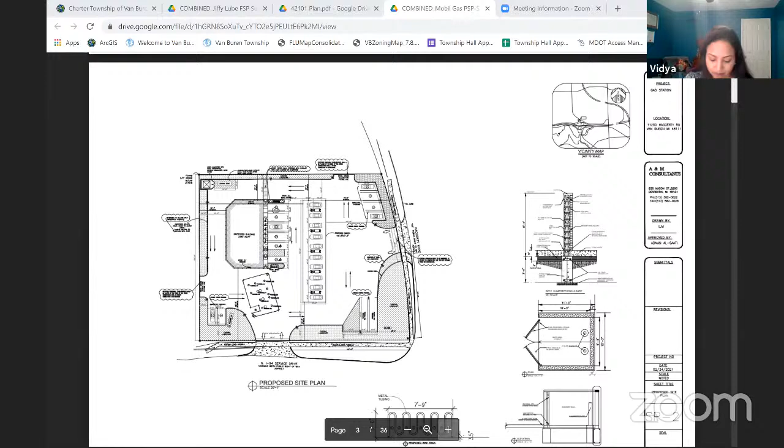With regard to cross-access, it is the township's policy to require cross-access to abutting properties because this is in the interest of a large-scale access management plan. The applicant has shown a cross-access on the north property line.

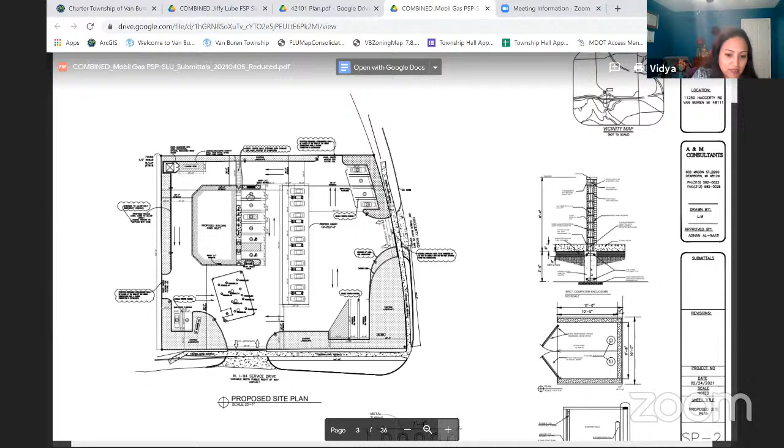If you look at the northeast side, Director Power, if you could zoom in a little bit, maybe it'll be more legible. Yes, the north access drive shows a cross-access point there. And then again, there is a cross-access shown on the southwest side of the property. Both of these will help connect in the future to any other development that takes place. Currently, those points are vacant.

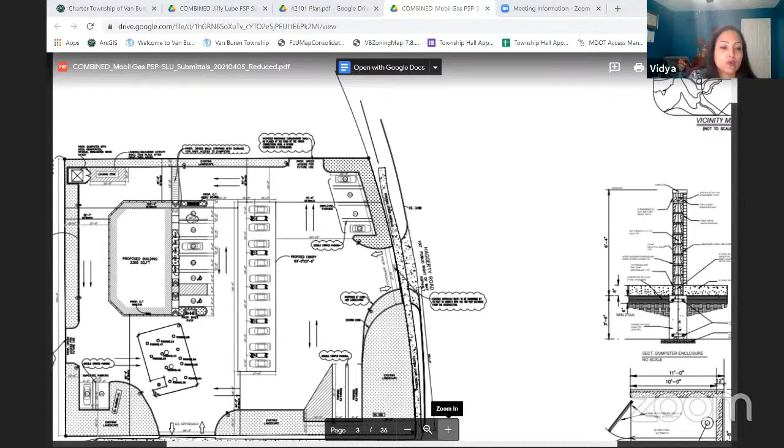There is a 21-foot wide access drive-through lane on the west side of the proposed building. So the drive-through works on the north side, moving to the west side, then the south side of the building, and exiting. We had the fire department review the width of the access drive on the west side of the building for adequacy, and that was approved by the fire department.

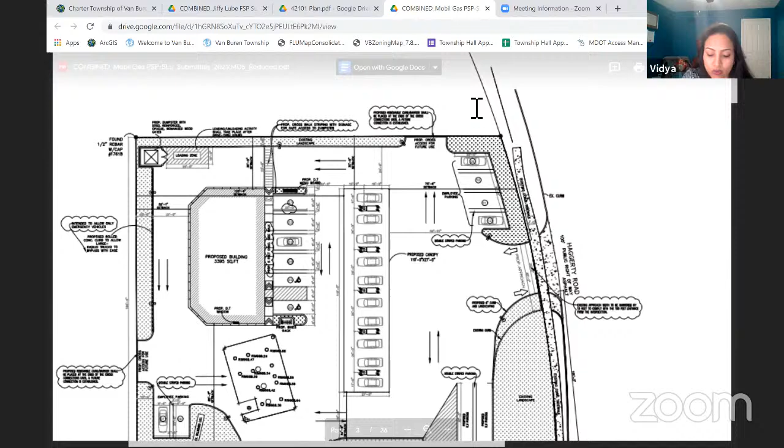There are existing sidewalks along the site's 2 street frontages. They're both 5 feet wide, and a new sidewalk is also proposed on the east side of the building with a width of 5 feet.

With regard to parking and loading, the ordinance has specific requirements for the number of spaces to be provided at the pumps and for the fast food restaurant itself. At this time, the site complies with all of the parking requirements. The applicant had to revise the site plan at least 3 different times in order to be able to meet the parking requirements.

Our ordinance also has a standard where, if a site is located within a certain distance from a freeway, you need to provide 2 spaces that are adequate for an RV or a trailer being pulled behind it to park.

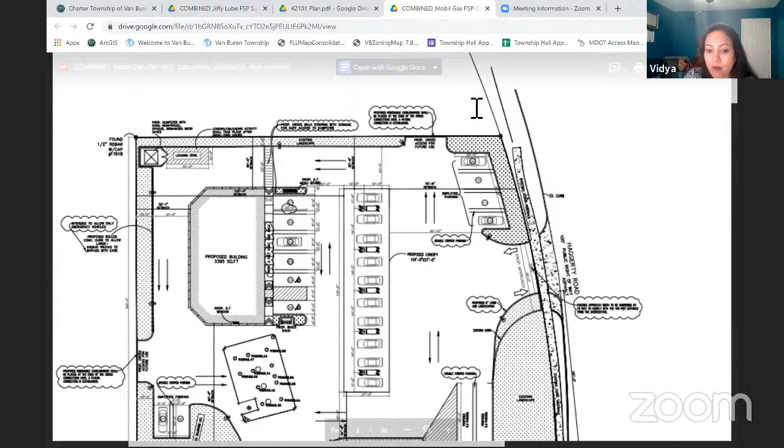The site plan shows that on the southeast corner of the site. It took a while for the applicant to revise the plans in order to find a space where they could actually accommodate those vehicles. 2 required barrier-free spaces have also been included.

Yes, this is a much clearer site plan. On the bottom right corner, you can see that is where the proposed RV parking spaces are shown. Since this is right off the freeway, I think it's a safe assumption that you will have people taking their RVs, stopping by to access the restaurant or the gas station itself. 2 barrier-free accessible spaces are provided, which meets the ordinance requirements.

A loading zone is required and is shown on the northwest corner of the site. It is not the most ideal location; however, there is no other possible place on the site where they could have placed it without interfering with circulation on the site. The applicant has noted that all loading and unloading activity will take place after drive-through hours so as not to create any blockage in the area.

A crosswalk is also shown on the north side of the building in order to provide employees a safe place to cross the drive-through lane and make their way across to the dumpster to get rid of the trash.

There are extensive landscape requirements for the site since it abuts the freeway, which includes frontage landscaping along the service drive and Haggerty Road, parking lot landscaping, landscaping along all the property lines, greenbelt buffering, and outdoor space landscaping.

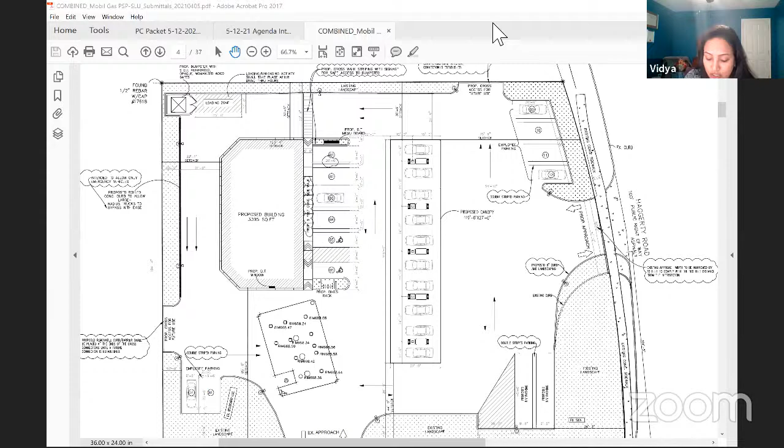The applicant has submitted a landscape plan which indicates several trees and shrubs along with ornamental plantings in order to enhance and update the site and make it look attractive with the new plantings proposed. There is a total of 4 trees on the site, 3 of which are more than 5 inches in caliper that the applicant is proposing to remove. They are replacing it on a 1:1 ratio as required by our ordinance.

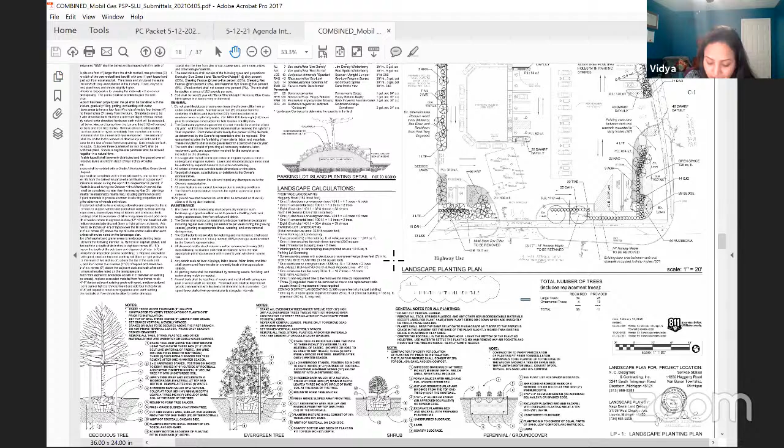Detention is going to be provided by an underground detention system, and that is subject to review by Wayne County and the township engineer. There is a photometric plan that has been submitted for this project.

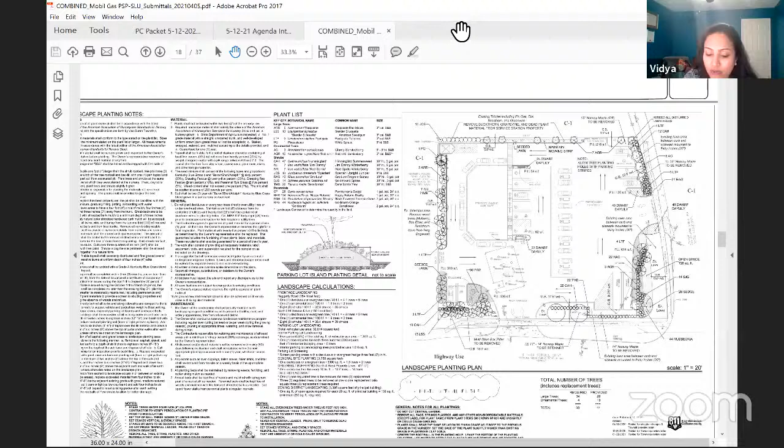It includes a combination of light poles and also building wall mounted fixtures. Manufacturer's cut sheet detail for the fixtures have been submitted, and those do meet the ordinance requirements, except for the light fixture shown on the underside of the canopy. If you look at the bottom left side fixture, which says LED canopy ceiling luminaire, that has actually got a

dropped lens, which means it's the old-fashioned style lighting where the light will spill out. We do not allow that kind of fixture, so that needs to be replaced with a lens that is flat, so that the light will be recessed within it and the light will fall down and be downward directed rather than spread out to the sides. So that fixture needs to be replaced.

The lighting plan also needs to show the entire light pole at this time. If you see on the bottom, the fixture mounting style is shown, but the entire light pole height from grade to the top of the fixture is not shown. That needs to be included.

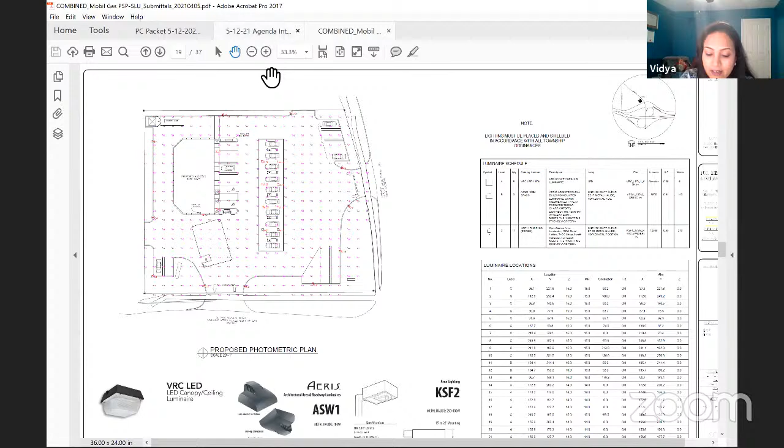With regard to architecture, the applicant did go several rounds before they came up with architecture that met the township ordinance standards. The drive-through window is located on the south elevation with the order lane wrapping around the rear of the building. The new gas station convenience store building will be constructed of brick, limestone, glass with a metal panel roof and suspended metal awnings. And the elevation does include a breakdown of all the materials that are proposed.

The gas station canopy, the old style used to be to have flat roof canopies. We had asked the applicant to consider providing some relief and not go with the standard flat roof and include some pitch. So at this time, they have included a pitched roof in order to give a slightly more architectural appeal to the gas station canopy itself.

Ideally, we believe a shingled roof would be more attractive, but we can see that the applicant has proposed a metal roof above the canopy, so it matches the metal roof that is on the convenience store building. So it sort of ties the two buildings together. However, the Planning Commission can provide their input whether they find the matching design an acceptable standard.

We, however, do recommend that if they are to go with the metal, they use an alternate color. The silver gray, I'm not sure if the rendering is not accurately reflecting it, but it looks sort of washed out. Maybe a different color can be used that actually enhances the brick and the limestone that's being proposed on the building. If you look at the rendering, the standing seam metal panels and the metal roofing that's being used doesn't really seem to work well with the rest of the colors on the building.

A dumpster enclosure is proposed on the northwest corner of the site, and it does meet ordinance requirements.

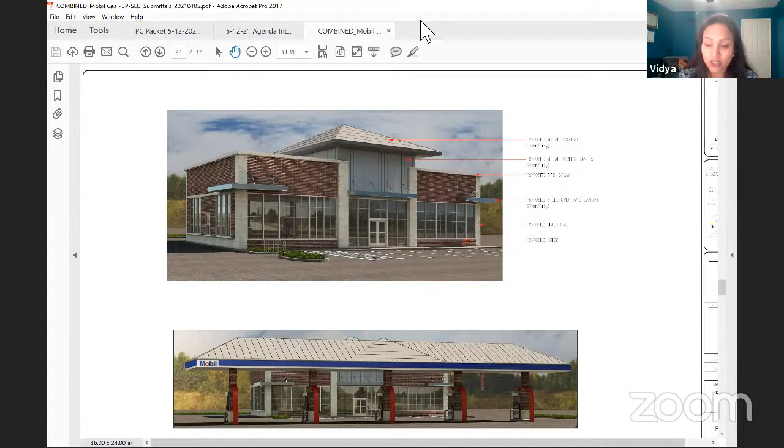So we need a detailed sign area package for what's going to be on the canopy. We also need more details on the menu board sign itself with regard to how tall it's going to be, what kind of illumination is going to be, and so on and so forth.

Finally, there is a tall, non-conforming pole sign located on the southwest corner of the site. It is labeled as a billboard on the sign. However, it is not a billboard based on ordinance definition. Billboard is something that advertises a business that is not located on the site itself.

In this case, it is a massive pylon sign. It says Mobil, so it's advertising the business located on the site itself. It is classified as a non-conforming pole sign, not a billboard.

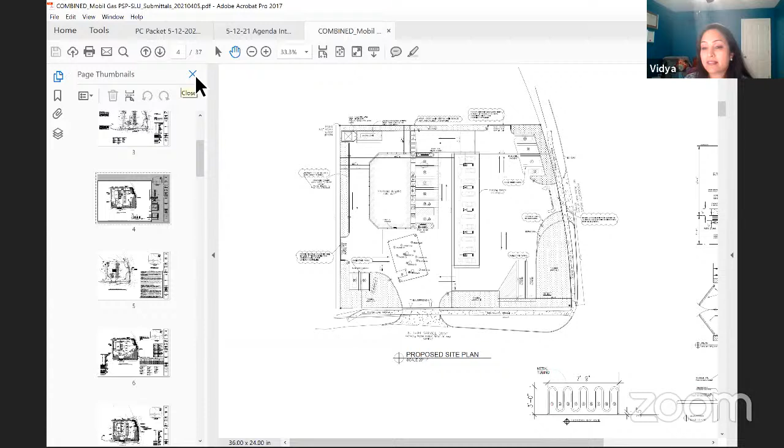The township, whenever it has reviewed a site undergoing full rebuild, such as the project before you tonight, has always encouraged and required the removal of existing non-conforming signs. So we had this comment in our first review letter. However, the applicant has kept the sign on the plans in the hope of retaining it. We continue to recommend that the non-conforming pole sign must be removed from the site. When everything else is being built new and in conformance with ordinance standards, there really is no justification for keeping a non-conforming sign on the site.

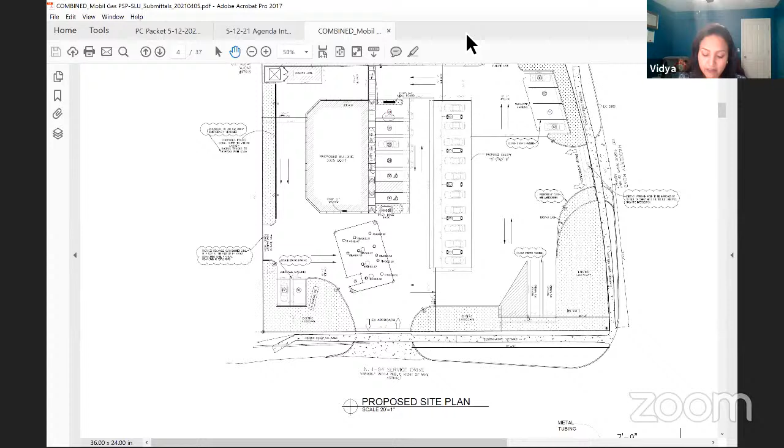The applicant has been working with the township for the past several months to revise the design and provide better circulation, better architecture, and accommodate all required parking. Therefore, we recommend preliminary approval of the site plan for the proposed Mobil gas station located at 11250 Haggerty Road, subject to the 6 conditions listed in our site plan review letter dated April 19th, 2021. I would be happy to answer any questions you might have.

Thank you, Ms. Krishnan. I think unless anyone has a question right now, we'll go on to Fishbeck's review and hear from Mr. Kamer.

I'll be reading from our Fishbeck letter dated April 22nd, 2021, for the Mobil gas station at 11250 Haggerty Road. We reviewed the plan for preliminary site plan approval. At this time, Fishbeck examines and reviews the feasibility of the engineering aspects of the site, but we'll hold off on conducting the full engineering review until a later time. We recommend the Planning Commission grant the Mobil gas station preliminary site plan approval for engineering feasibility.

With this recommendation, it is understood that the applicant is required to conduct further investigation of all existing site utilities, and adjust and expand their underground utility design to accommodate these findings, which I will touch on again as I go through the letter. Please note the previous site plan had been recommended for preliminary site plan approval in our previous letter dated November 11th, 2020.

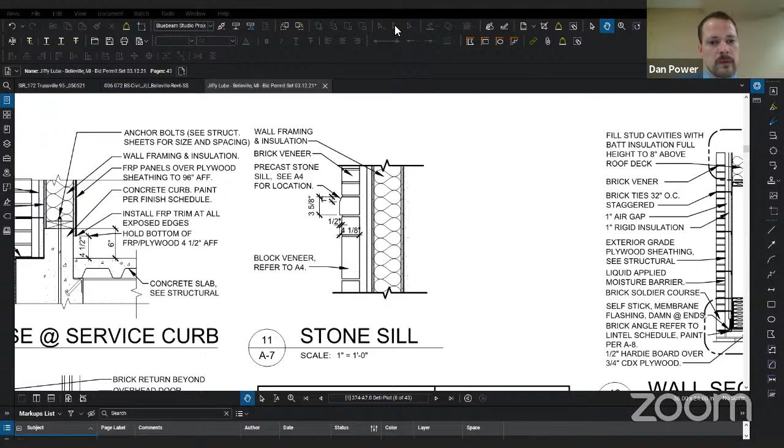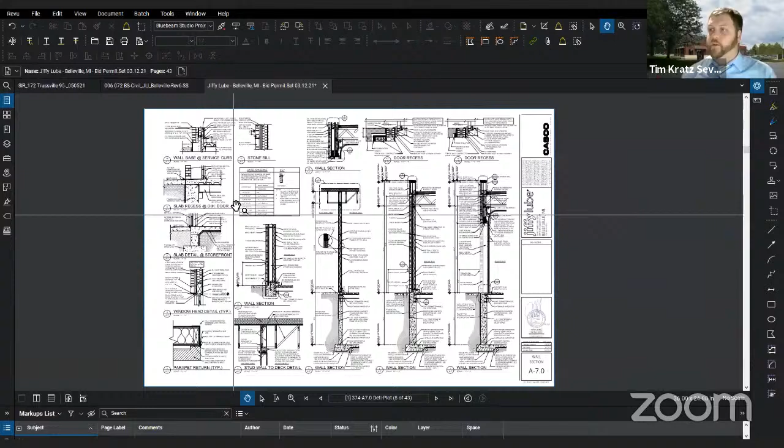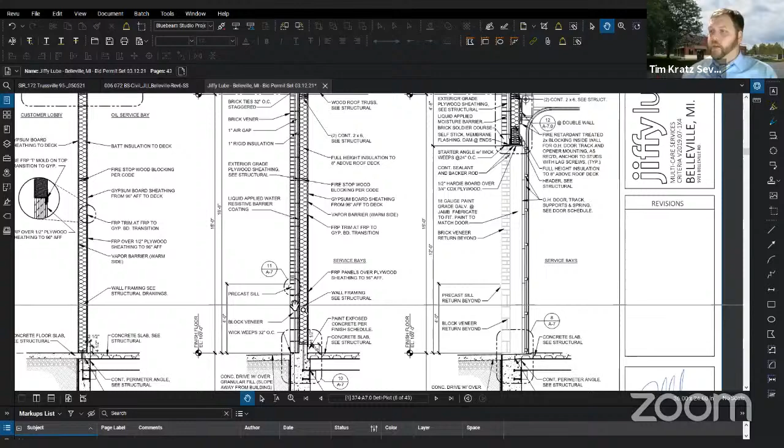Are you able to see a detail, stone sill detail? Okay, so as referenced in the letter from McKenna Associates, this is plan sheet A7.0 referenced on our elevations. As in the previous comments, we did remove the thin brick veneer and replace it with full brick. Here you have a wall section along the front, with a block veneer with a precast sill that I'll show in large detail in a second, and then a full modular brick above. Our intent is to comply fully with the requirements and recommendations from the previous letter, as indicated on the last page of the McKenna letter.

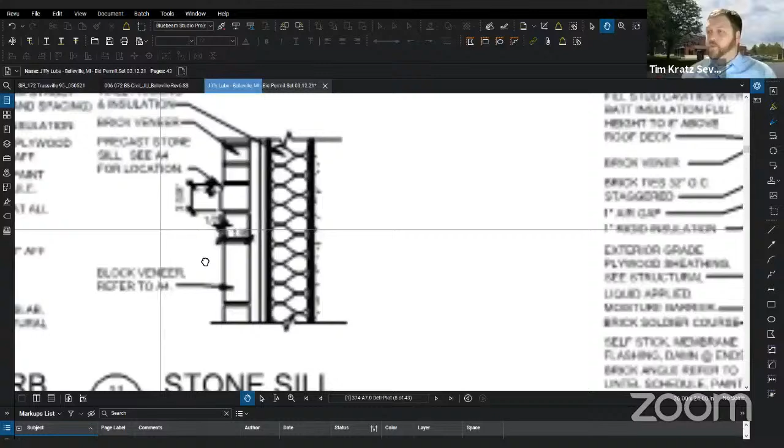So that is the wall section, and here's an enlarged view for the stone sill. Again, you see the block veneer for the bottom wainscot course with the stone sill, and then the full-size modular brick veneer above.

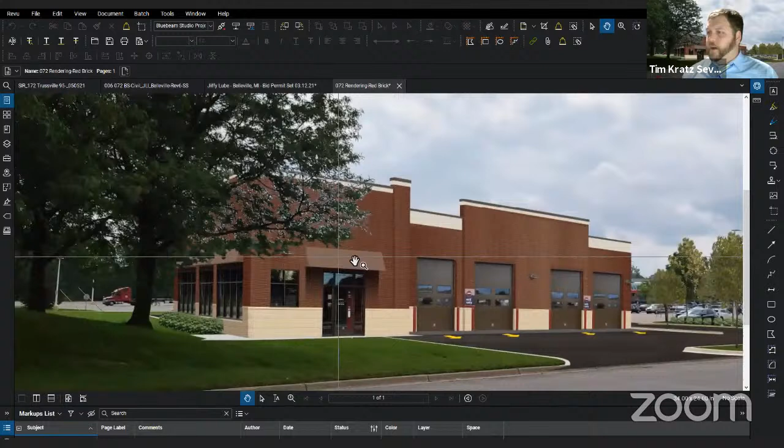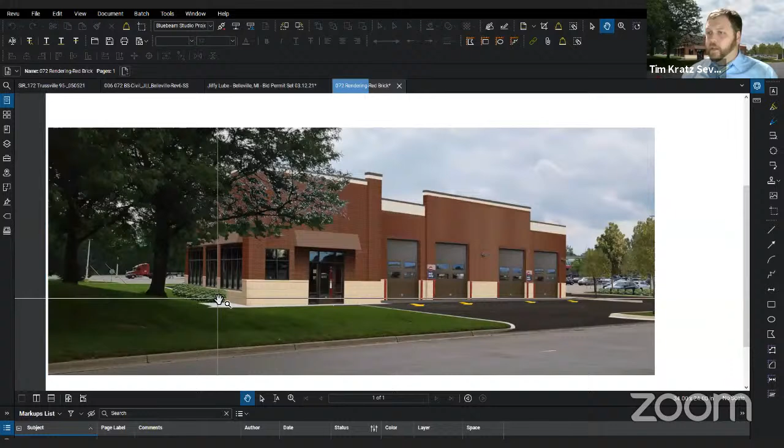Also, I have a colored rendering of the building to demonstrate the color scheme. One thing I'll identify is that this is missing our horizontal accent soldier course, but the color scheme is what we'll see in the future, and it was selected in conjunction with staff to match the surrounding developments, the Meijer and other items in this area. We feel the look, color, and materials are a good match for the area and continue the look in your overlay district along this road.

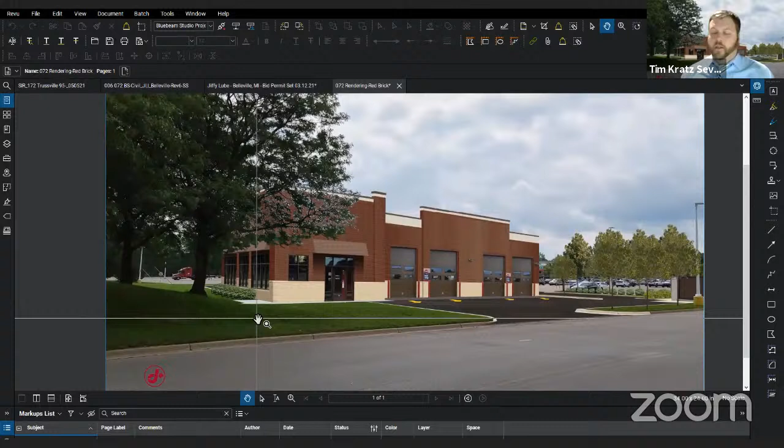With that, I think I'll open up to questions from our side. It was a very comprehensive review from staff and in your review reports. That's great, thank you so much. I'll ask for questions and comments from the commission first.

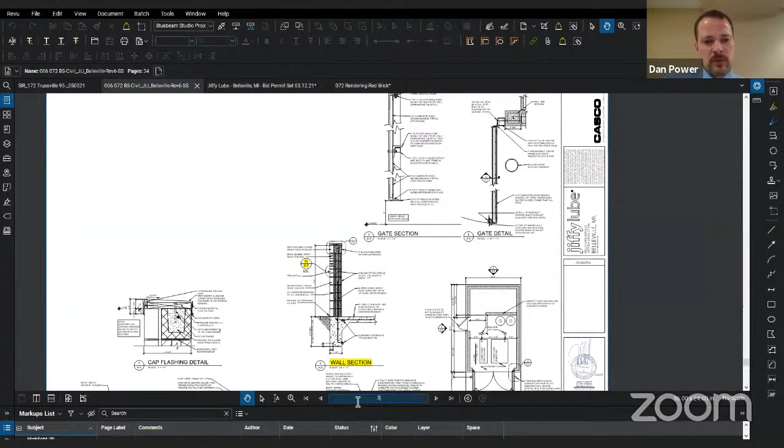Madam Chair, is the tax parcel ID now combined into one tax parcel ID, or is it a brand new tax parcel ID different from the two called out in the agenda? That's a question for staff. Through the chair: the parcel division was approved by the township assessor. The underlying parcel fabric that defined the original application is what the noticing was based on. So that's still underlying everything, but the land split application has assigned a new parcel number to the parcel on the west end, and that's being processed and will be updated in the next tax rolls.

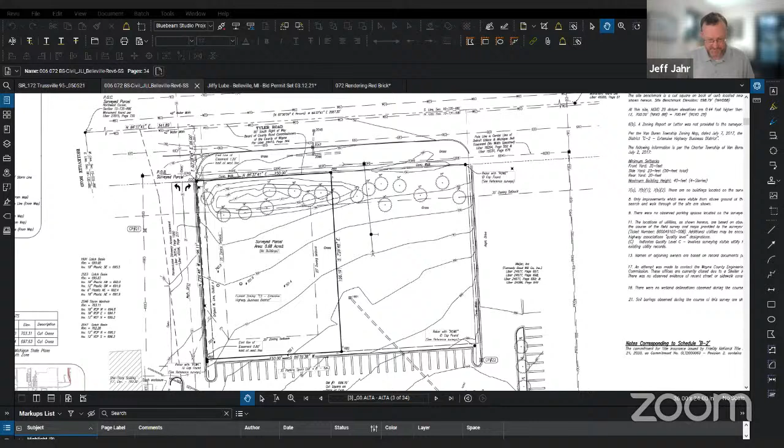Okay, I was thinking about the process of making a motion, whether we needed to read the new parcel ID in or not as a technical matter. I would comment, I do like the color rendering of the building. It's very nice, thank you for the effort you put into making it look so great. We appreciate that comment. Anything else, Commissioner? No, ma'am. Great, thank you. Other comments or questions from the commission?

Anyone in the audience? Questions or comments for staff or the applicant? Any hands raised, Director Power? No, I see no hands raised and nothing in the chat. Okay, the applicant has done their homework and responded to all of the conditions previously.

Is the Planning Commission ready for a motion? Madam Chair, Commissioner Jahr, quick question for staff. Fire Marshal Lanahan's comments that you read into the record, were they dated, or are they simply referenced to his letter of February 24th? The new letter was April 19th. That's the date.

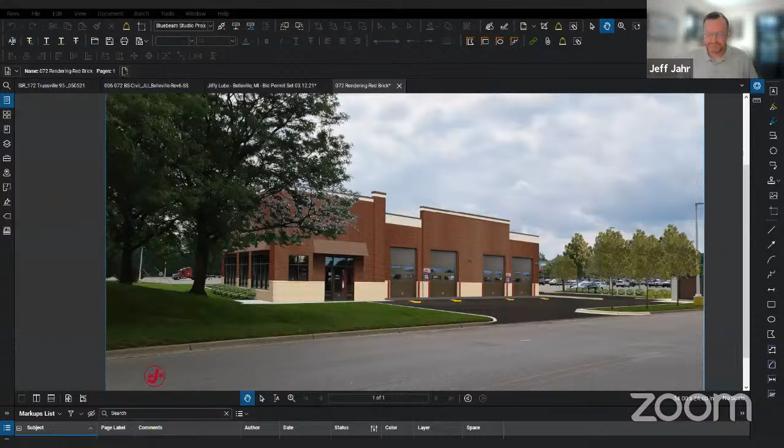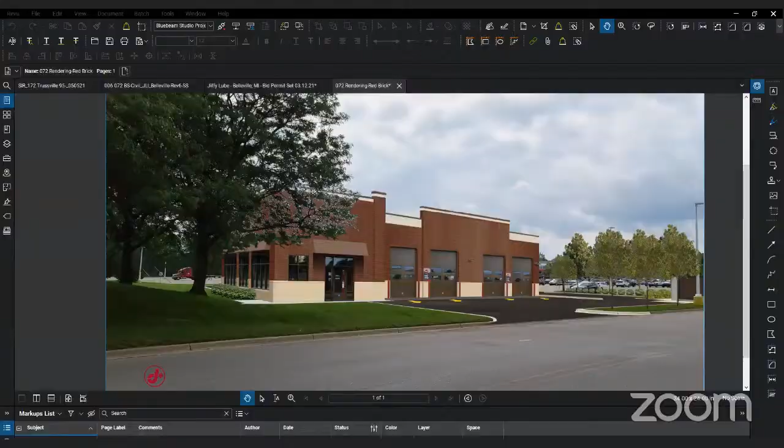Great, thank you. Is there support? I'll support. Commissioner Cullen, support. And a roll call vote, please. Sherry Budd, Yes. Brian Kelly, Yes. Brian Cullen, Yes. Jeff Jahr, Yes. Carol Thompson, Yes.

All right, we have our final approval, some homework to do with the engineers, and we'll look forward to seeing your lovely building when it's up on Tyler Road. Thanks so much to the applicant, thanks to staff, our planners and engineers, and Director Power and all of his staff. Excellent work, thank you very much. Have a great night.

We are to general discussion and updates. Director Power, anything to report? I will keep the Planning Commission posted on the agenda for the May 26th meeting.

Otherwise, I will just reference that we did have a comment in the chat on a non-agenda item, a question from Mr. Stephen Dark about residential developments. Are there any updates about the lakefront condo development off of Huron River Drive? And other than that, are there any new potential single-family housing developments that might come along soon? It's been a long time since the township has seen an entirely new subdivision.

There are no updates on the previously discussed concept for a residential development at 41620 East Huron River Drive, which is my assumption of what Mr. Dark is asking about. I could be wrong, but there's also no other formal applications for new single-family housing at this time, although we have had some preliminary conversations about some residential concepts in the last 6 months, but nothing has come forth as an application yet. That's all my updates.